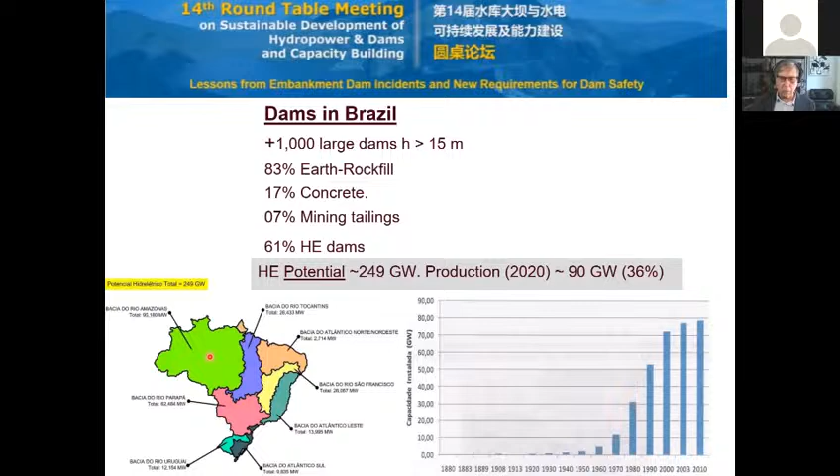Brazil has a very large hydroelectric potential, about 250 gigawatts. And last year, we were already producing about 90 gigawatts, which is about 36% of our potential. The remaining energy production will probably be concentrated in the Amazon River, the North region, where most of our water is available.

But as I said, I will concentrate on the tailings dams. And then, more specifically, I will talk about the cases of Fundão in Mariana village and B1 dam in Brumadinho village, which were the 2 most recent accidents.

Most of our tailings dams accidents are due to problems in the drainage system, leading to instability of the dam. As most of them are made with the upstream construction method of heightening, they are prone to liquefaction. And we can define risk of failure as probability of failure times the consequences or damages.

And we can summarize saying that at each period of 30 years, 3 decades, the accidents risk is increasing 20 times because the height of dams increases 2 times in the period. Today, we have some tailings dams over 300 meters in height.

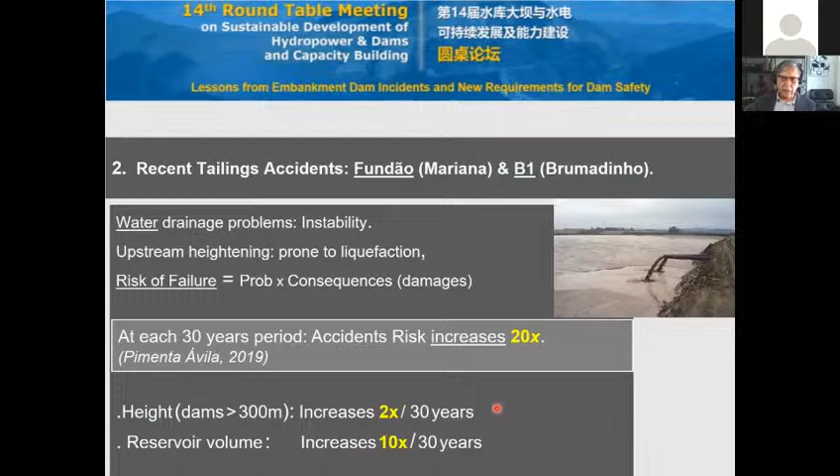And as a consequence, the volume of tailings, which is related to the consequences, increases about 10 times. So 2 times 10, the increase on the risk of accident is about 20 at each 3 decades period. Let's start with the first case history, which is Fundão Dam in Mariana.

As a result, we had 19 people dying. It happened in November 2015. Schematically, we had the failure of Fundão Dam here at the left, and then all the tailings formed a mud flow, went down the valley and reached the water reservoir of Santarém Dam, which was overtopped,

and all this material in a mud flow went down the valley, hitting the village of Bento Rodrigues, which is part of Mariana. It destroyed the village completely, and then the mud flow proceeded on down, reaching the Doce River, and went on its way to the Atlantic Ocean.

Let's talk about the reports on this tragedy. The first one was the Justice Department report from the Minas Gerais state in southeast Brazil. This report stresses that we had irregularities and negligence of the mining company because of the fast, careless heightening of the dam.

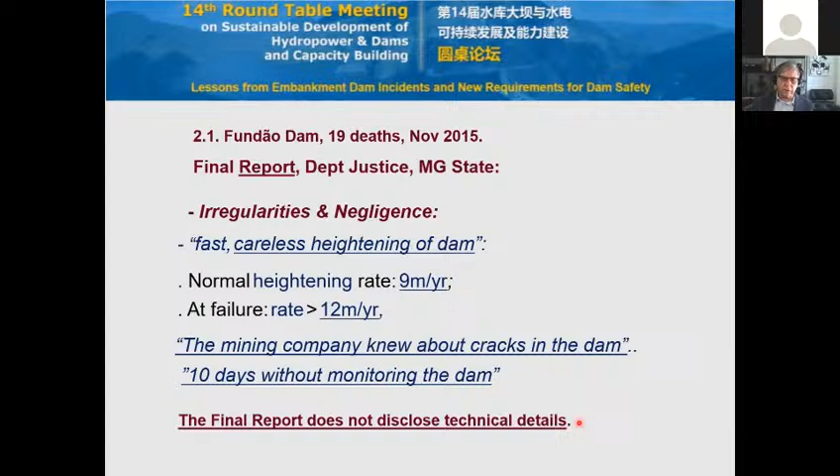For that, we need to go to the expert panel review report, and the expert panel was chaired by Professor Morgenstern from Canada, together with 3 other specialists in tailings dams.

And I will just mention the 2 main incidents that are described in this report. The first one, about 5 years, 6 years before the accident, showing that the dam had a serious piping incident. And this picture was taken from the report.

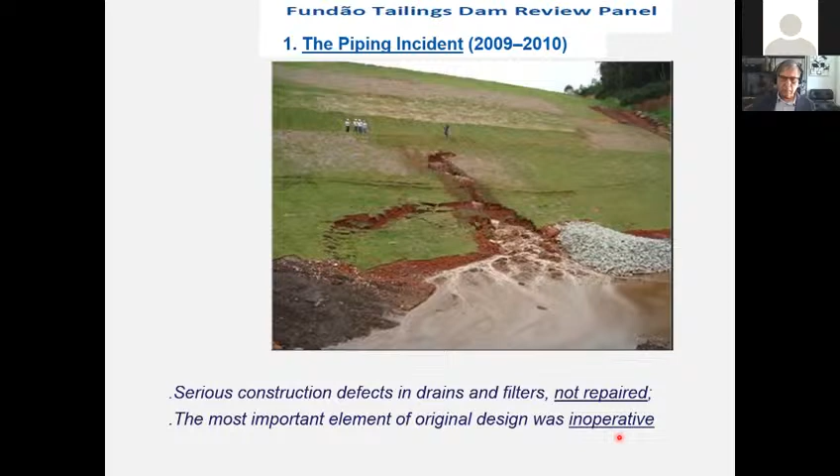They say serious construction defects in the drain and filter system happened and they were not repaired. And this was the most important element of the original design, and it remained inoperative till the day of the failure.

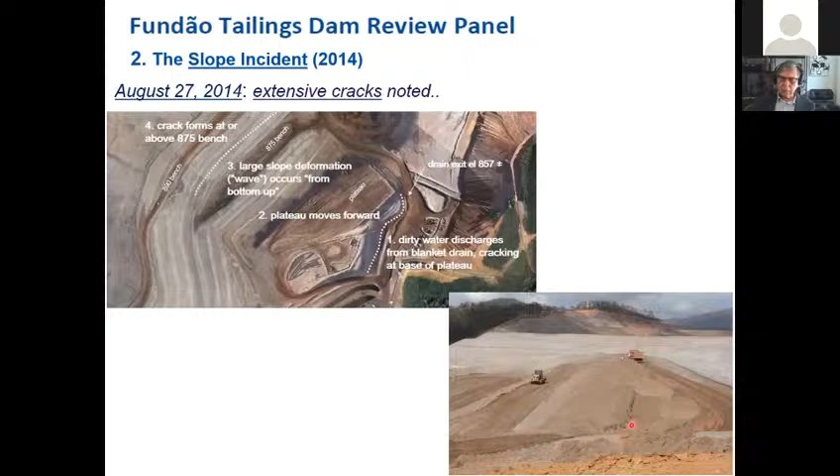The second incident described in the panel final report is about 1 year before the accident, showing that the cracks in the dam were noted. And this is a picture from the report showing a crack developing at the crest of the dam.

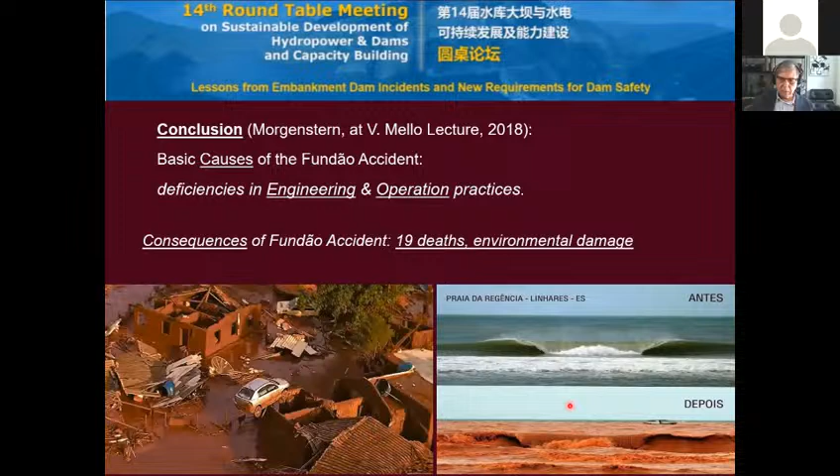After this accident, we did a master's research at the Catholic University on a back analysis of the B1 dam. And we had a factor of safety of about 1.05 using the Spencer method, a rigorous method of slope stability. Together with that, the probability of failure was 1 to 4.5 using the FOSM method, which is the simplest probabilistic method. These are numbers that show that the dam was in a very bad safety condition before the accident.

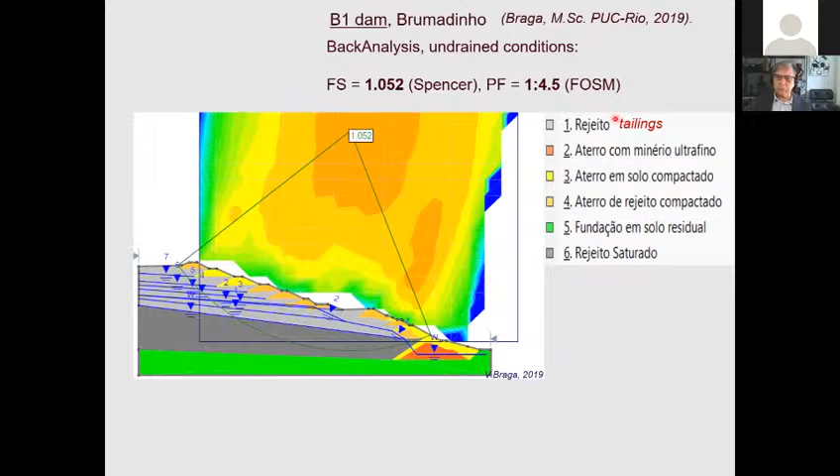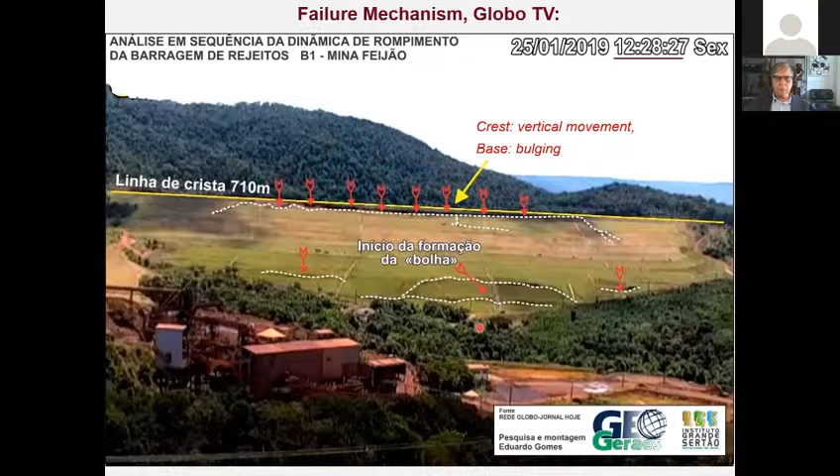It is interesting to stress that this was taken from the safety camera at 12:30, lunchtime. People were having lunch in the restaurant exactly in the downstream region of the dam. But most interesting is that this picture shows that at the time of the start of failure, we can see people walking on the downstream slope. And the mining company said that this was a normal thing to happen. But at lunchtime, mining workers have lunch, they don't walk at the dam.

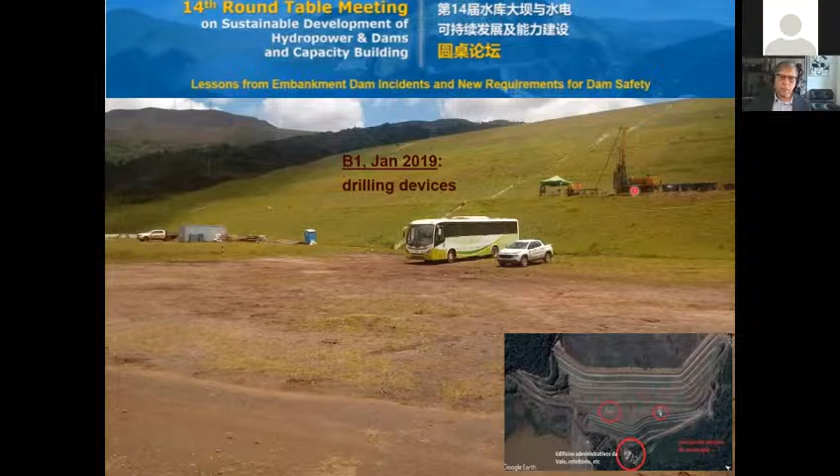The TV went on searching for answers, and they reviewed this picture taken a few days before the tragedy, showing that a very big drilling device was in operation at the downstream slope, and this was for drilling, for installing new piezometers at the dam. Then the mining company hired two reports. The main one is this one, chaired by Professor Peter Robertson together with 3 other people, to investigate the causes of the Brumadinho accident.

And they didn't reach only one cause, they have about 5. First, they stressed that the upstream method of construction was not the best one. It is technically dangerous. And they stressed that the dam was very steep. They mentioned that there was a loss of suction due to heavy rain, increasing the water level in the reservoir, in the tailings. They also mentioned the creep of the fine and loose tailings that remained undrained due to problems with the drainage system. And also, let's move on, the liquefaction.

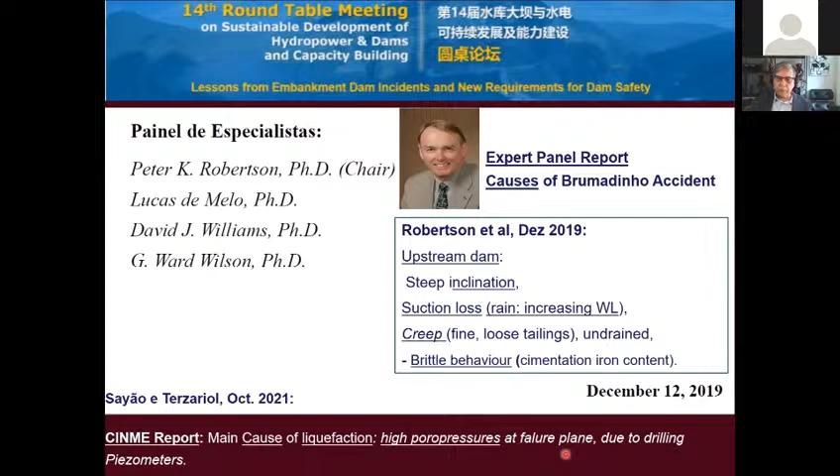We have a second report on the causes of this tragedy. This was made by the University of Catalonia in Spain. And I had the opportunity of reviewing this report together with Professor Terzariol from Argentina. And it is clear that the main cause of liquefaction was the high pore pressure at the failure plane due to drilling. Okay, let's talk about the consequences of the Brumadinho accident: 300 deaths, severe environmental damage, and a bridge collapse, as we see here.

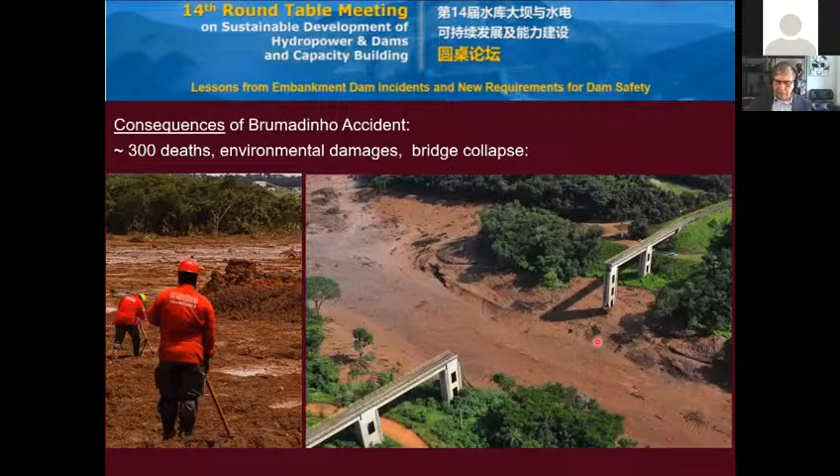Finally, as concluding remarks, I can just mention the difference between dams whose reservoir has water and tailings dams. The first one, the water dams, are built in a few years, 4 or 5, and the water is the main asset of the hydro firms, while the tailings dam is built over decades, perhaps 2 decades, and it is the main liability cost of the mining firms. Therefore, they spend less time and less money studying it. Well, I think that's about the time.